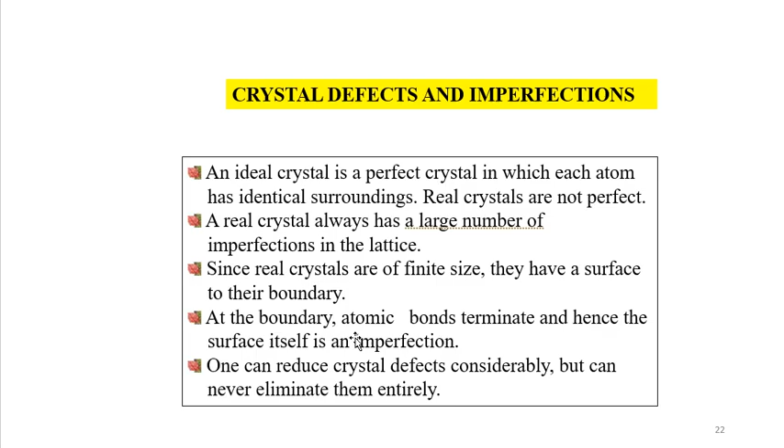Crystal imperfections can be classified on the basis of their geometry into categories or types. First, point imperfections, where a point in the lattice is missing. Next, line imperfections, where a line in the lattice diminishes, becoming a defect. Then surface imperfections, involving the top surface or another layer. Then volume imperfections, which appear like cracks.

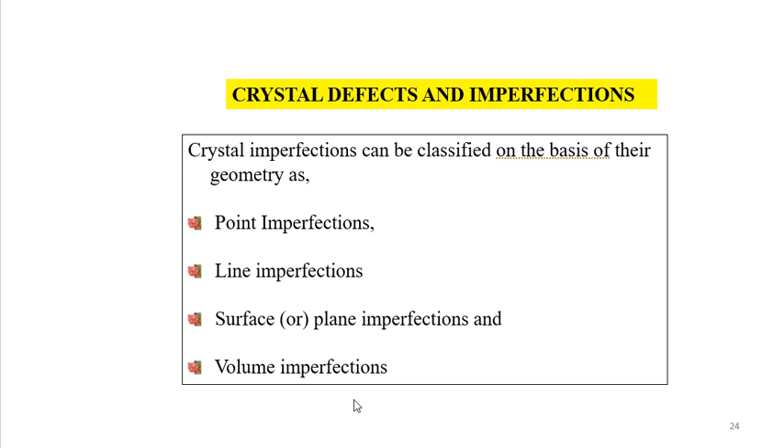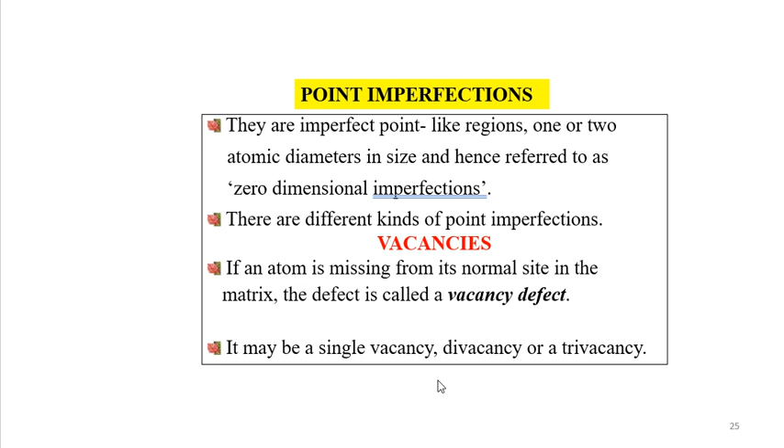In metals, vacancies are created by thermal excitation. When the temperature is sufficiently high, atoms vibrate around their regular position, and some acquire enough energy to leave the site completely — they absorb energy and get excited, moving to another place. When the regular atom leaves, a vacancy is created.

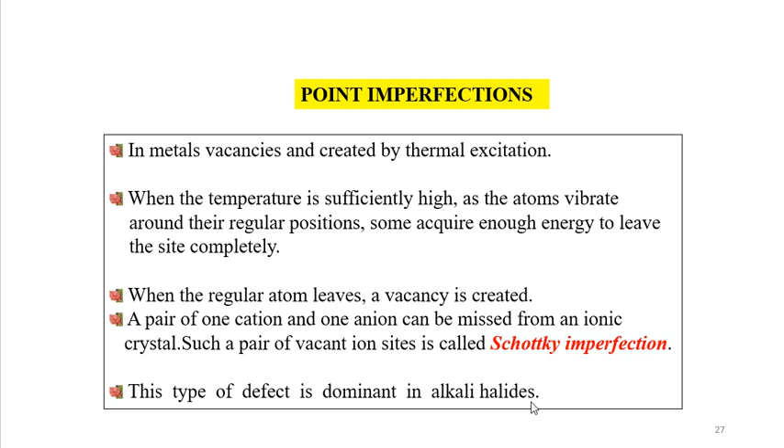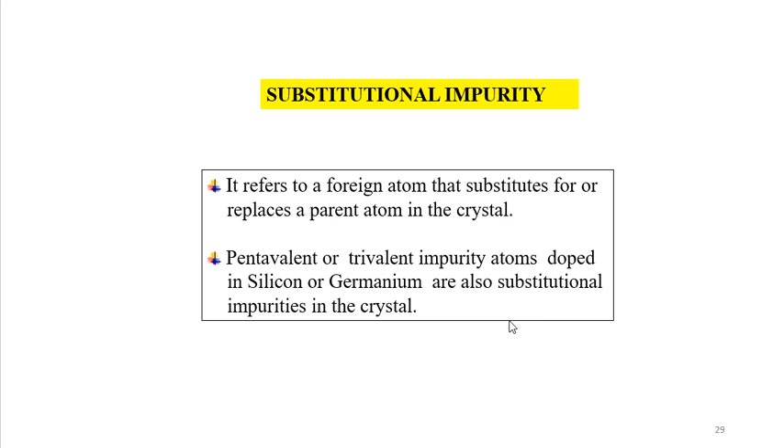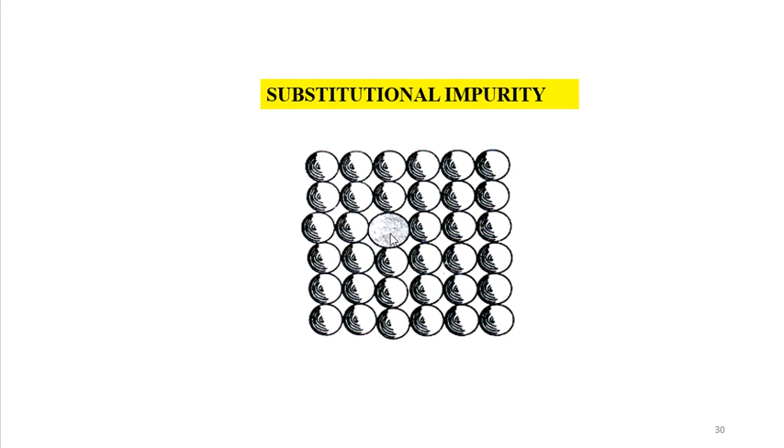Then there's substitutional impurity, which refers to a foreign atom that substitutes for or replaces a parent atom in a crystal. Pentavalent or trivalent impurity atoms doped in silicon or germanium are also substitutional impurities in the crystal. Here you can see the void filled with another atom — that is substitutional. It may not affect the properties at present, but due to changes later it will affect them, and you can also see a change in size.

Then we have interstitial impurity. The interstitial defect arises when the atom occupies a position in the lattice that is not normally occupied in the perfect crystal. In crystals, packing density is always less than 1. If a small size atom occupies the void space in the parent crystal without disturbing the parent atoms from their regular site, it's called interstitial impurity.

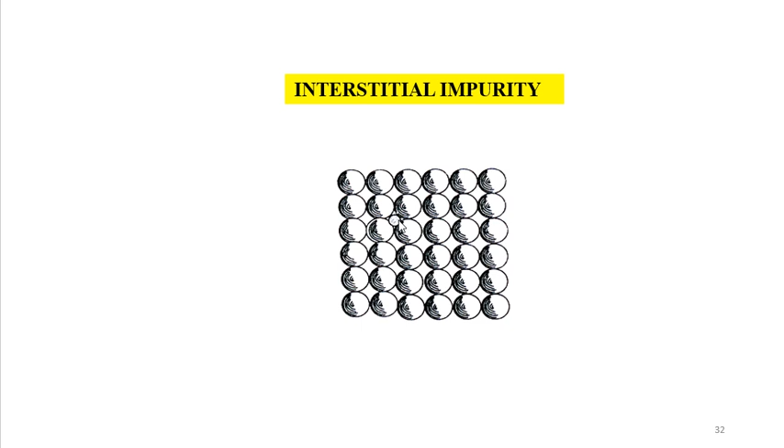Here your regular arrangement is there, but the impurity doesn't affect the regular arrangement, it just gets some space here without damaging the other arrangement. That is called interstitial impurity.

In ionic crystals, an ion displaced from a regular site to an interstitial site is called Frenkel imperfection. As cations are generally smaller, it is possible for them to get displaced into void space after finding some void. Anions do not get displaced as the void space is too small compared to the size of an anion.

As you know, cations are small, anions are huge, meaning their volume is high. So if anions are replaced by cations, that is okay, but cations can't replace anions due to the size. A Frenkel imperfection does not change the overall electrical neutrality of the crystal. This type of defect occurs in silver halides and calcium fluoride.

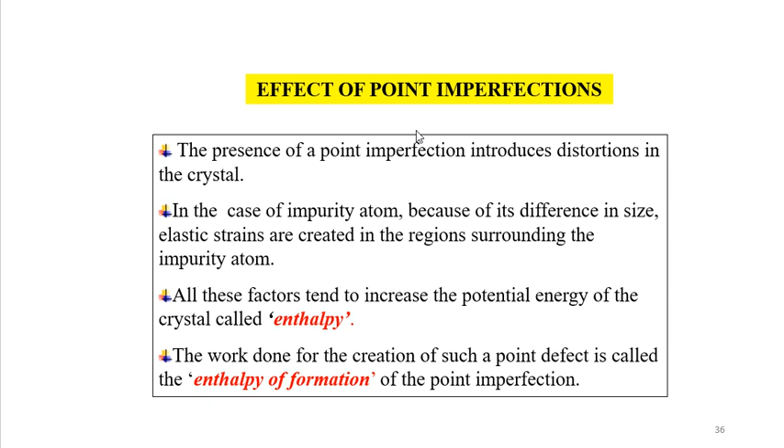Next one is line imperfections. Now you can clearly understand what point imperfections are and their types, how they happen, whether internally or externally. Now we move into line defects. In the previous case, only a point was missing. Now some near points as a line are missing.

The defects which take place due to dislocation or distortion of atoms along a line in some direction are called line defects. We now have direction. In point imperfections, you do not have any line, only a point. But here you have to identify what direction that line is formed. Line defects are also called dislocations. In the geometric sense, they may be called one-dimensional defects, 1D, only a line, not a kind of area.

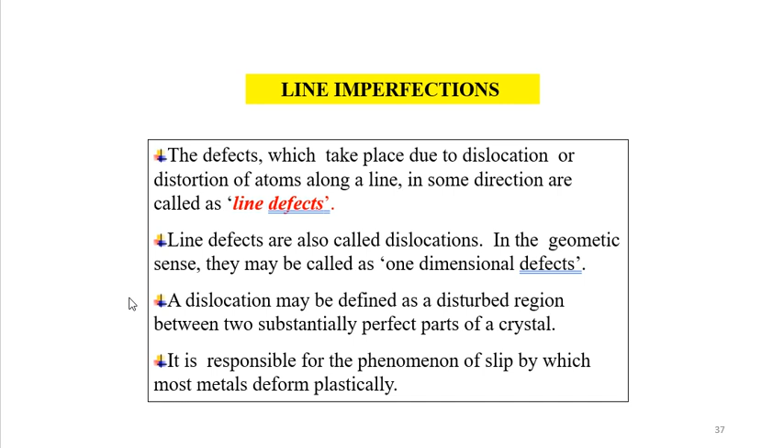A dislocation may be defined as a disturbed region between two substantially perfect parts of a crystal. Because if you want to define a line, you need 2 points. With only one point, you can't define a line. So if you have 2 points, then you can define a line. So more than 2 points is called a line, and more than 2 point dislocation defects is also called line defect. It is responsible for the phenomenon of slip, by which most metals deform plastically.

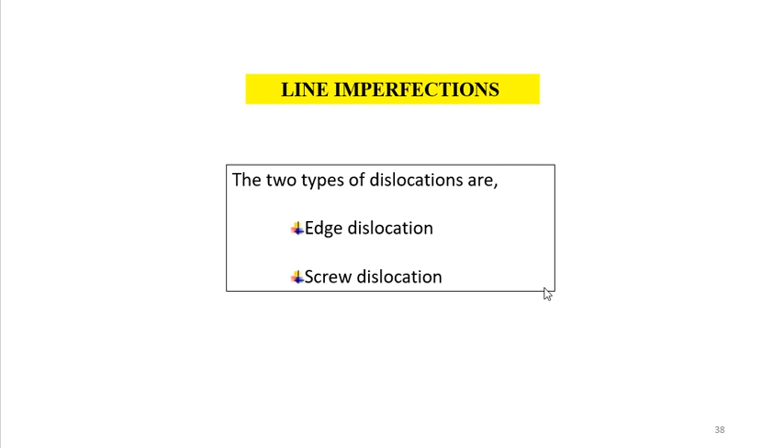In line imperfection or line defect, you have two different types: edge dislocation and screw dislocation. In edge dislocation, in a perfect crystal, atoms are arranged in both vertical and horizontal planes parallel to the side faces, because you have 3D X, Y, Z planes, arranged parallelly. If one of these vertical planes does not extend to the full length but ends in between within the crystal, it is called edge dislocation.

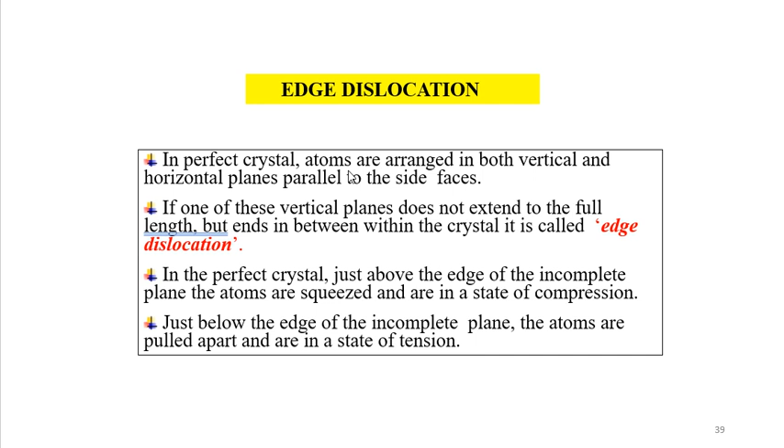If one of these vertical planes does not extend to the full length, with some decrease of length, but ends in between within the crystal, it is called edge dislocation. So in the perfect crystal, just above the edge of the incomplete plane, the atoms are squeezed and are in a state of compression. Just below the edge of the incomplete plane, the atoms are pulled apart and are in a state of tension.

You can see it goes into a 2D, 1D direction here. It means it goes, it gets removed, then it tends to have a kind of dislocation. The distorted configuration extends all along the edge into the crystal. Thus, as the region of maximum distortion is centered around the edge of the incomplete plane, this distortion represents a line imperfection called edge dislocation.

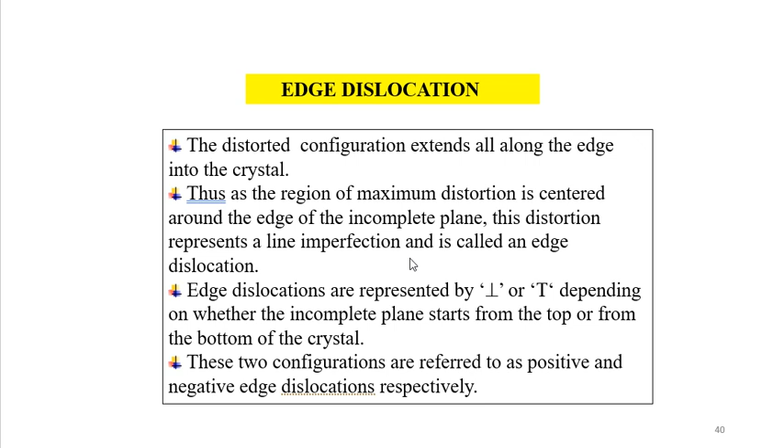It is represented by this symbol, T or inverted T, depending on whether the incomplete plane starts from the top or from the bottom. These two configurations are referred to as positive and negative edge dislocations respectively. Here you can see this comes here and stops here, so this starting and ending makes it T. If it starts from here to here, then it is negative T.

Then there is a method that they started to use to nominate this type of dislocation, at the points where you have the displacement. It's called Burgers vector, because you have direction here. To identify the direction, you need a vector quantity. The magnitude and direction of the displacement are defined by a vector called the Burgers vector.

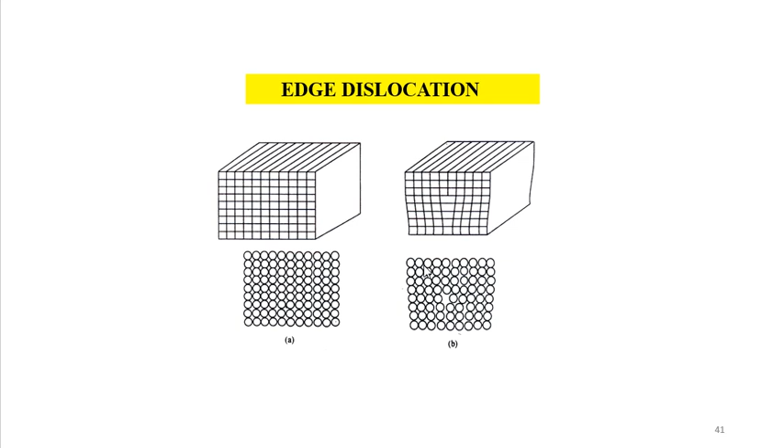In the following figure, starting from point P, we go up 6 steps, then move toward 5. A vector helps you identify the point of imperfection. Here you go 1, 2, 3, 4, 5, 6 and go downside 5. Here you see the defect, like what we do in our vector notations. Then move toward 5 steps, move down by 6 steps, and finally move toward left to reach the starting point, which is the starting point of the Burgers circuit.

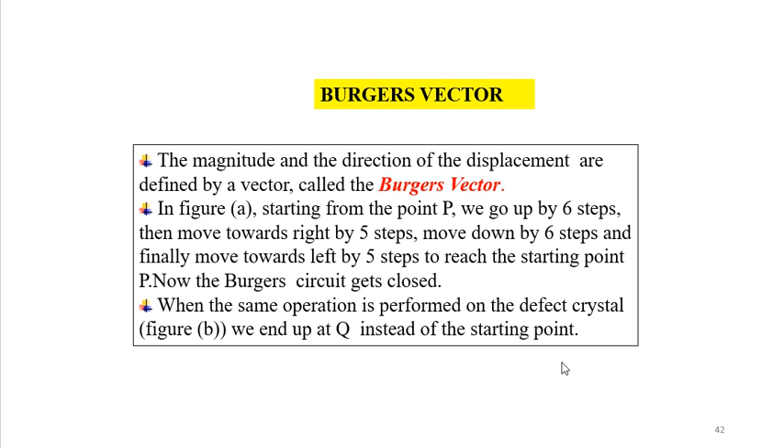Then it is closed. So when the same operation is performed on the defective crystal, we end up with Q instead of the starting point. Those are the notations we use for our Burgers vector. So we have to move an extra step to return to P in order to close the Burgers circuit.

Starting from here, it goes up, goes to this, and like this, you can actually complete your circle, with no misplacement. But if you go with this one, along with P, and come here, then go after here, you can see 1, 2, 3, 4, 5, 6. Here also 1, 2, 3, 4, 5, 6.

You need to go down, so you need to go down with this plane, not the vertical plane. So then you go 1, 2, 3, 4, 5, 6. From that point you need to go with the horizontal one: 1, 2, 3, 4, 5, 6, 7.

7 points you need to go horizontally. Again, 1 2 3 4 5 6, you need to go 6 points. Then 1 2 3 4 5 6. Here you can see you are changing your starting point. So that means you are moving away from P, right?

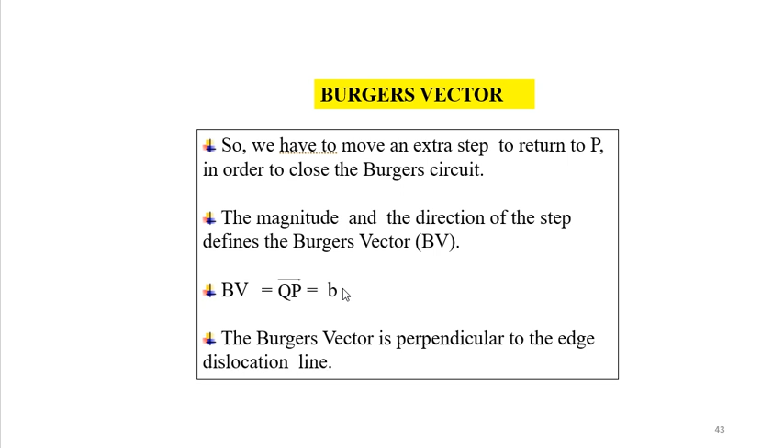From end to starting you need to come to one point, to your right side, then it is a vector point B. So we have to move an extra step to return to P in order to close the Burgers circuit. So the magnitude and direction of this step define the Burgers vector BV. Then QP is B. The Burgers vector is perpendicular to the edge of the dislocation line.

This is perpendicular to the dislocation. This is a dislocation plane removal. Then it is normal, right? That is what edge dislocation means. Any questions? Please ask.

Then we move into screw dislocation. In this dislocation, the atoms are displaced in two separate planes, perpendicular to each other. It forms a spiral ramp, that means around the dislocation. The Burgers vector is parallel to the screw dislocation line. Speed of movement of a screw dislocation is lesser compared to its edge dislocation. Normally the real dislocations in crystals are a mixture of edge and screw.

So in the edge you can see only a 2D one, but this one is 3D, right? Simply, the Burgers vector is something complex here, right? Okay, we'll see.

Here, this is the starting point, right? So you can go along with this and go here. Likewise you can come to one of the ending points, but after starting you have a different dislocation here, so then it should be identified with the Burgers vector.

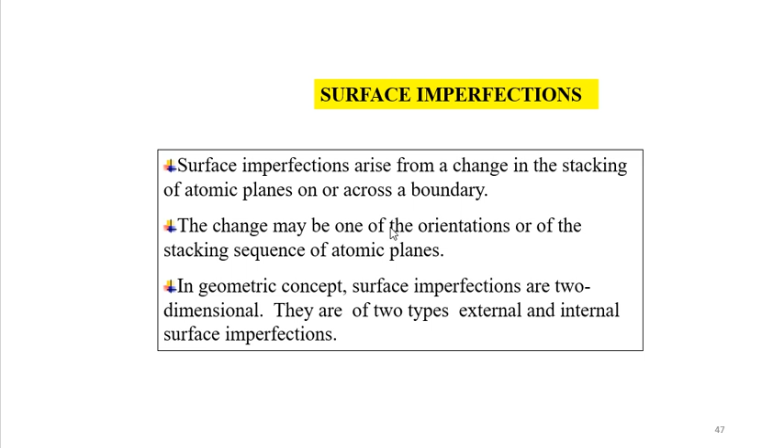External one means the imperfections represented by a boundary. At the boundary, the atomic bonds are terminated. Likewise, I have mentioned like edge one, but it goes to the surface, right? Then you have external surface, but in your edge dislocation, your surface is inside due to the void or due to that missing part. But here, this surface goes to the external one. So they are the imperfection represented by the boundary, where the atomic bonds are terminated.

You can see it. The atoms on the surface cannot be compared with the atoms within the crystal due to the lack of bonding of the surface. The reason is that the surface atoms have neighbors on one side only, right?

So here you can see, if you compare this one and this one, you will see. And again this one, these three, right? Here you can see this one has huge neighbor atoms - if you count 1, 2, 3, 4, 5, 6, 7, 8, 9, like 8 numbers here. But if you compare with this one, only 1 and 2. Here you have 1, 2, 3, 4, like it comes. So that is the difference with the external surface - you have some kind of differences.

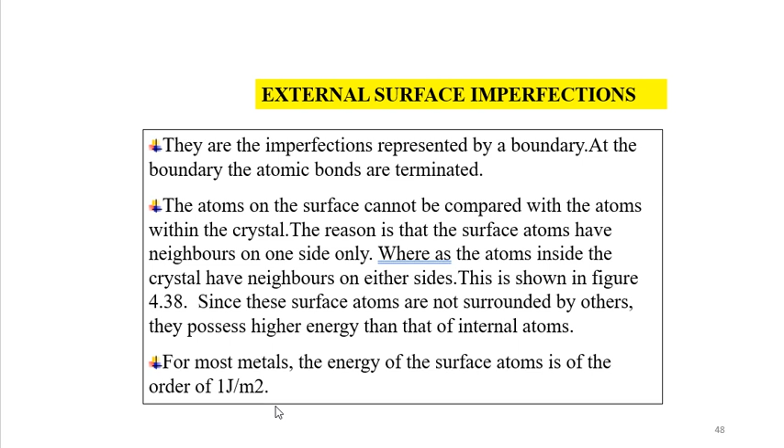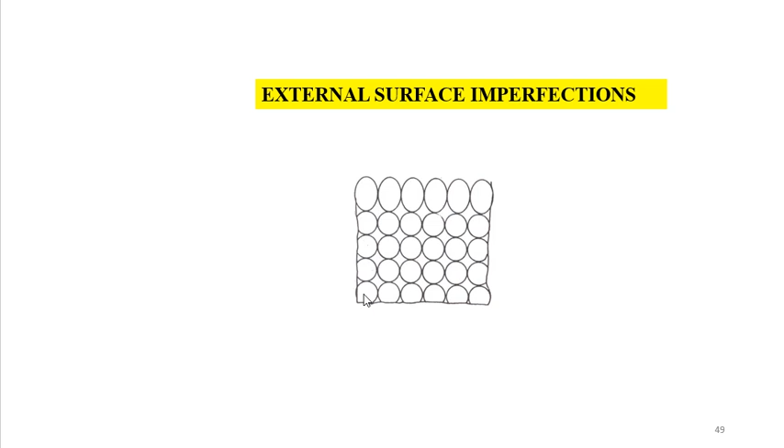This is shown in the figure I showed you. Since these surface atoms are not surrounded by others, they possess higher energy than internal atoms. For most metals, the energy of the surface atoms is of the order of 1 joule per square meter - that is the surface energy. Here you can see the changes inside the material and the surface, and the surface also has different areas, right? Here and here, these are also different areas.

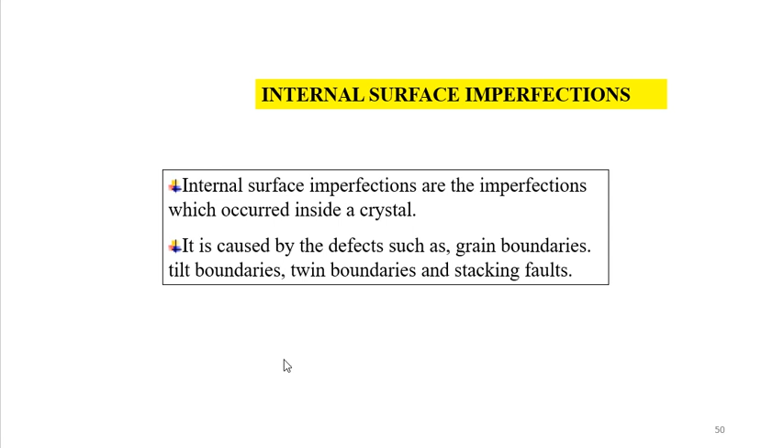Then we come to internal surface imperfections. Internal surface imperfections are the imperfections which occur inside the crystal. So one I mentioned is the external one at the surface, but here it's internal, inside the crystal. It is caused by defects such as grain boundaries, tilt boundaries, twin boundaries, and stacking faults. Those are the types.

Now we will see what is called grain boundaries. They are the imperfections which separate crystals or grains of different orientation in a polycrystalline solid during nucleation or crystallization. As I mentioned in the crystallization stage - crystallization and recrystallization - they show the difference between crystals and grains, how the grains occur, how the crystals occur. I also mentioned nucleation, then separation, those are growth. All these have been shown.

So they call it the imperfection which separates crystals or grains of different orientation in a polycrystalline solid during nucleation or crystallization. It is a two-dimensional imperfection. During crystallization, new crystals form in different parts and they are randomly oriented with respect to one another. Now you know what grain boundary means and how the grains are arranged inside metals or materials - the different orientations because they have different shapes.

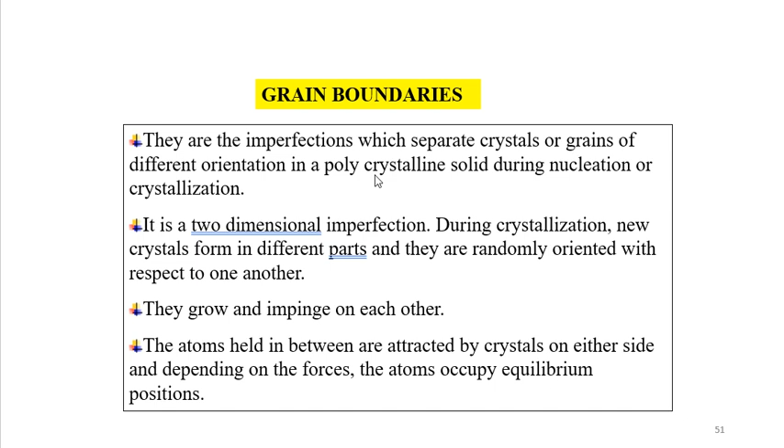These positions at the boundary region between two crystals are distorted. As a result, a region of transition exists in which the atomic packing is imperfect. So I'll draw something like this - okay, this is one grain, and again this is another one, and again you have another one like this.

So this grain I'll note as A, this one A, then B, and C. So A and B can use this boundary here, and again B and C also use this one, but A and C can't use this one. If you have a D here, then D and C can use it because of the separation changes - that is the grain boundary here also.

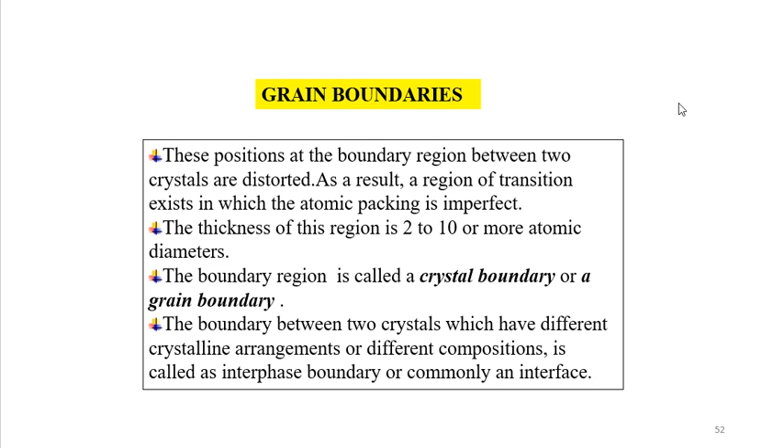The boundary between two crystals which have different crystalline arrangement or different composition is called an interphase boundary, or commonly an interface. So I already wrote here the different areas, but they have a common boundary - different areas, common boundary - they have different kinds of properties, but the area, that grain boundary, both of these grains can use.

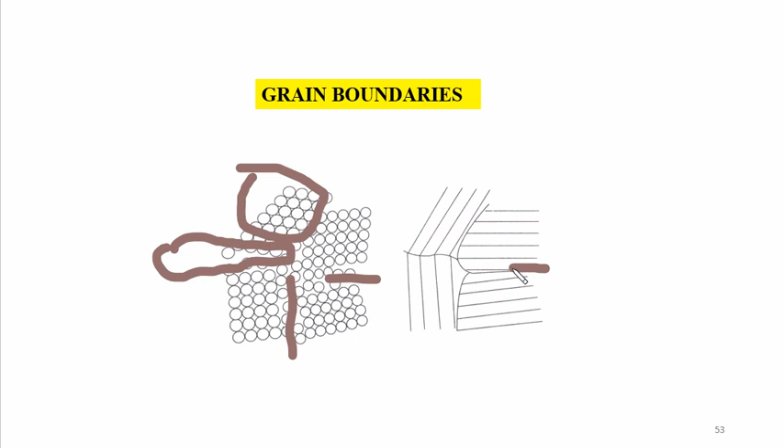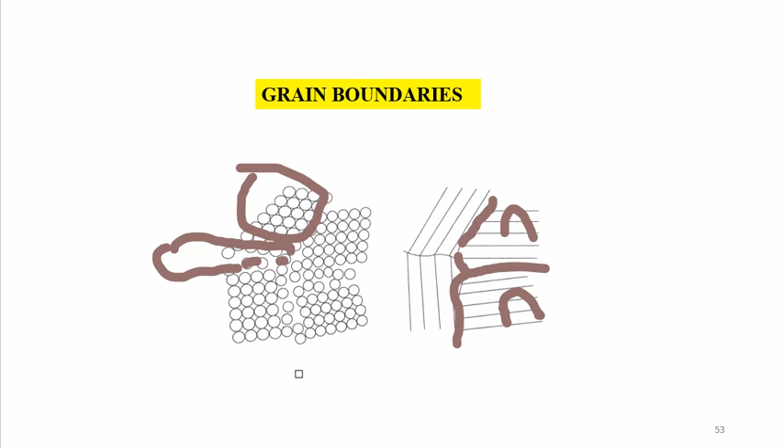Here you can see these arrangements. This is one crystal, this is another crystal. In between two crystals you have an area where you can't see exact arrangement. Here you have a good arrangement, but in this area you can't see any arrangement. These are called grains or crystals. This one is a crystal, this one again a crystal, each with different kinds of boundaries. From the boundaries they tend to break the arrangement of crystals. You have crystalline arrangement and amorphous arrangement, but here we discuss only the crystalline one.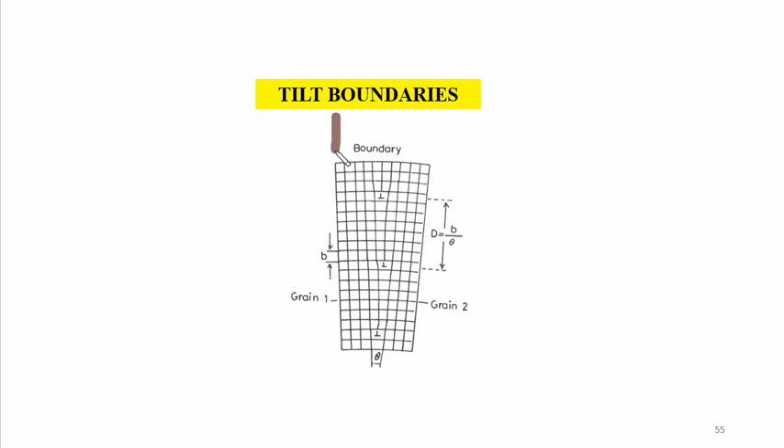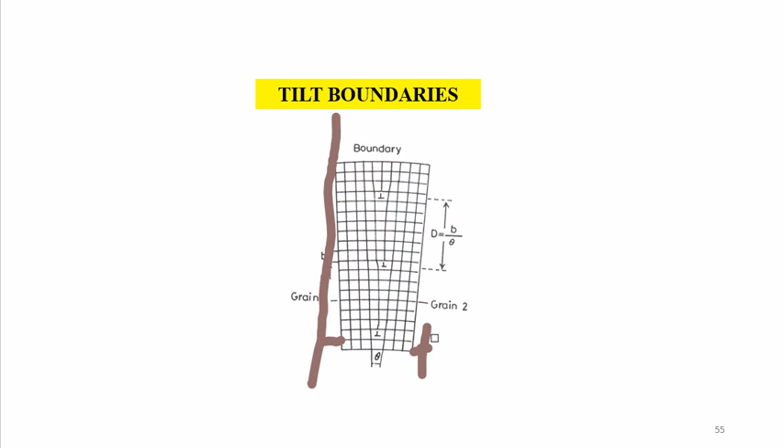Using that, you can see the arrangement is tilted, because it should go vertically like this, but now it has some differentiation. This is what I call theta. So if you find that theta, that is the tilting angle of this crystal. That is how the tilt can be found here.

This is the original distance D. Then B is one, meaning we call it the Burgers vector unit. From the x direction, this is one unit, second unit, third unit, likewise you count - that is called the Burgers vector unit. D is the average vertical distance between dislocations. To get the average, you can get the total and divide by 2. Normally those two are equal. So to get the perfect average, you take the total and divide by 2.

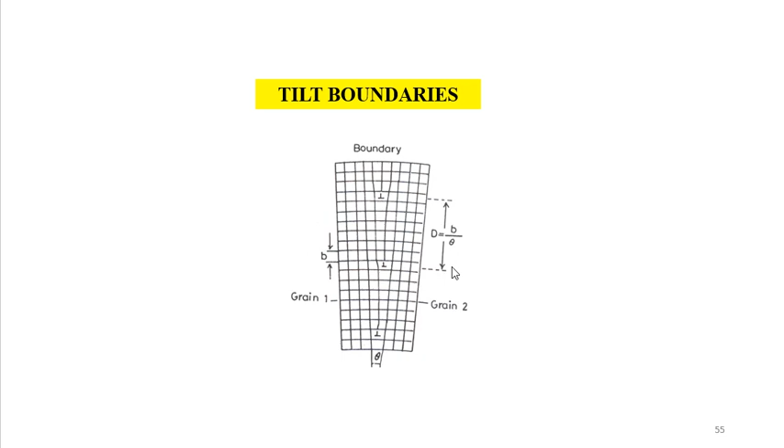Then D here, B over theta. The D number you can calculate here also: 1 2 3 4 5 6 7, so D is 7. Then B is your length divided by theta. Then theta you can find as B over D. Here, B over D, you can also get the tilt, which we call the tilt angle.

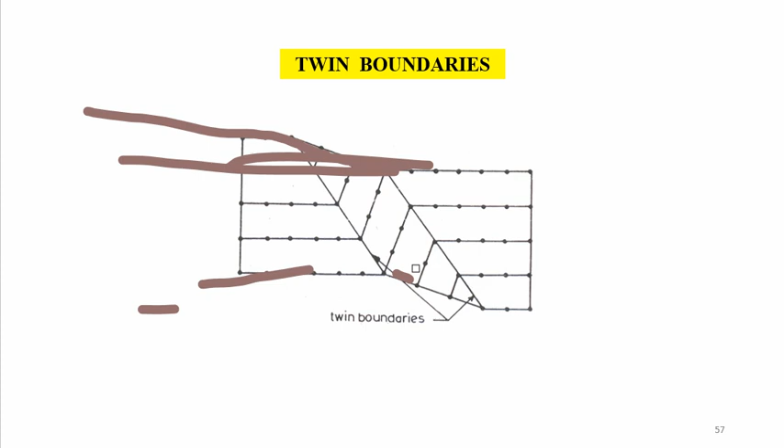If the normal arrangement goes like this, that's normal. But if twinning happens, it goes like this instead, changing in only one direction. If the second boundary happens, then it should go back like this - both ways it changes. Then it is called twin boundaries - twin action, like the difference of action of two forces.

We call them stacking faults: whenever the stacking of atoms or atomic planes is not in a proper sequence throughout the crystal, the fault caused is shown as a stacking fault. For example, the stacking sequence in an ideal FCC crystal may be described as ABC, ABC, ABC, ABC. But the stacking fault may change the sequence so that C is missing - ABC, AB, then A, again ABC - due to a fault.

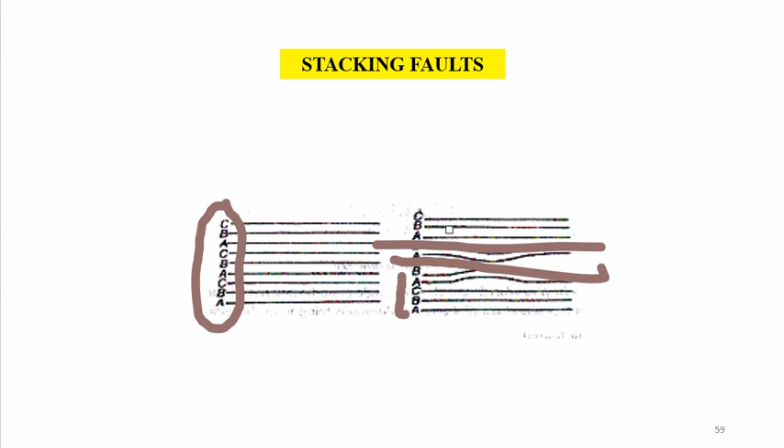The region in which the stacking fault occurs forms a thin region and becomes HCP, hexagonal. This thin region is a surface imperfection called a stacking fault. Here, normally you have ABC, ABC, ABC arrangement, and that's okay. But starting from here, A is okay, B, C, then A, B, C is missing, but some arrangement happens with the lines of these two. You can see how the lines change, and C is not there. Then starting with A, B, again C is not there, but then A, B, C comes again. So those are the kind of faults you can identify, called stacking faults.

So those stacking faults also happen to start something from the imperfections. Then it goes to initiate a crack or initiate a dislocation movement inside the material, like edge dislocation. So now we've discussed imperfections like point imperfection, line, surface, and now we come to volume imperfections.

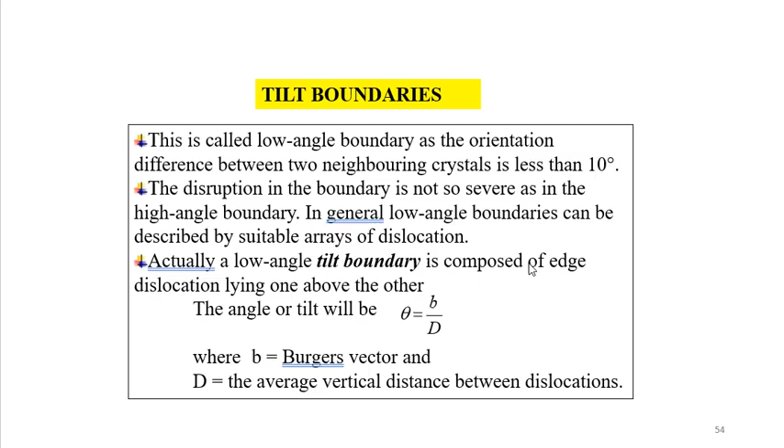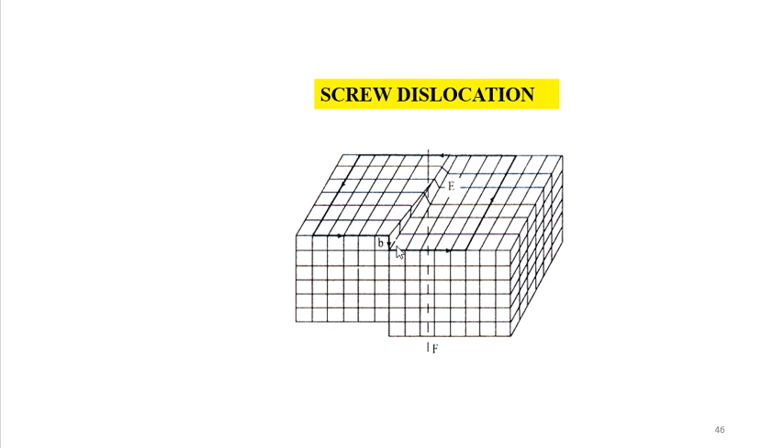As an example, like a cake - this one is a cake. If you try to get a slice from this, a parallel slice, then it is removed. So removed means you can see a volume there - some amount in the x direction, some amount in the y direction, and some amount in the z direction. This is something we identify as a volume-wise missing. So volume defects such as cracks may arise in crystal, because a crack you can see only as 2D, but it goes deeply into the Z direction as well, so some amount of volume is lost.

So when there is only small electrostatic dissimilarity between the stacking sequence of close packed planes in metals, then presence of a large vacancy or void space when clusters of atoms are missing is also considered as a volume imperfection.

That means, if you have a soil sample or soil cube, and you do a borehole from the top surface and remove some soil from that surface, then go deeper and remove some amount of soil from inside as well - the removal from the soil sample forms a kind of shape that you can form with the removal of that volume sample. That is also how you can form a volume. So that volume is misplaced, not a single atom or a single line - you have x direction removal, y direction removal, and z direction removal. So the total will be removed, and that removal happens like the volume one. Then we call that volume imperfection.

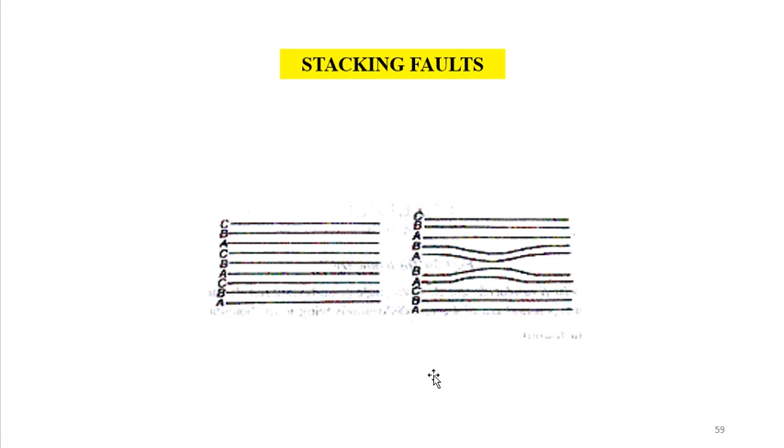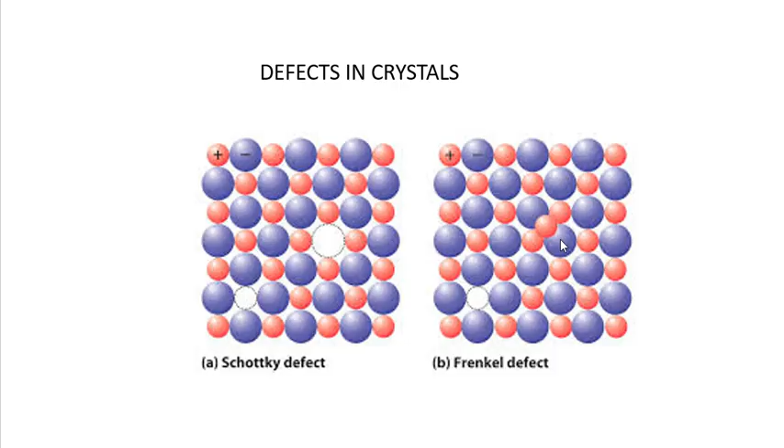So if you have these type of imperfections, there are so many imperfections that we already discussed. Then it goes to a point where we have - already showed you this one. Here this one is missing, both are missing, but here only one is missing and it keeps aside like this. So all of these happen due to some ways of finding energy for the excitation.

Here you can see this is the cracking. Inside this cracking you can see an amount of volume is misplaced, because if you apply stress here, this volume will remove, but another volume will fill, as here. So this is your original position - these two are your original positions. So the starting is this.

So sometime back, this one comes to like this, then again this one comes to like this. So you remove this part - you remove this part, this one, and this one. You remove it, but separately you find something new, these two. So if you get it volume-wise, this volume - these two are equal to the removal of this one.

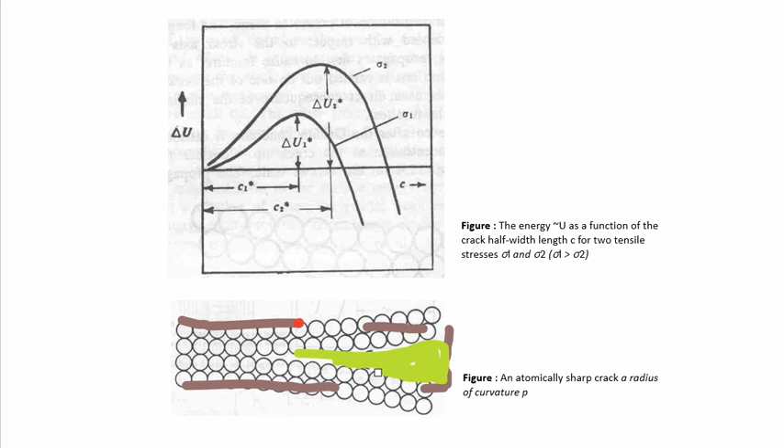That is a physical appearance that we can also see, right? Only thing is it moves up or changes location, but the challenge is if it propagates through up to this point, that is okay. Up to this one, separation has happened, but the total separation is not happened. That means it's not totally separated into parts. But if it separately comes from here to here, then we call that a failure.

Only this one is a fracture, but if it comes to this point, then we call that a failure. So that is the difference. The fracture can happen, or dislocations, anything can happen, but if it comes to a point where there is a separation of their volumes or their regions with the material, then that is what we call failure, not a fracture.

So fracture can happen if you have the excitation energy, like delta u, then it will propagate. If the propagation comes to the other end from here to here, then it tries to separate both, we call permanent. If it separately comes to positions of two, meaning separate elements, then it is a fracture propagating to a failure.

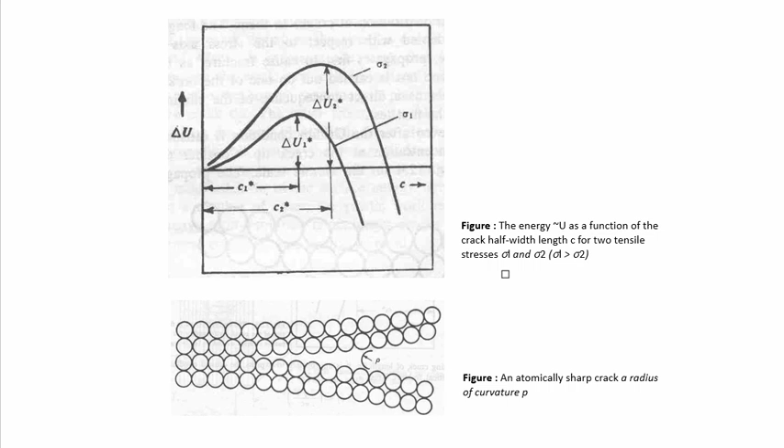So now you can see the difference between what is called fracture, what is called failure, and defect. Those are the imperfections and the defects. After the imperfections or defects, then it will move to a fracture like this, but this fracture is not called failure. These are the fractures that happen, these are the imperfections that happen, but that is not the failure. The failure means this has to come to here and to here. So this propagation needs to happen to the 3D dimension.

So if it comes to 3D dimension, then what happens? Those two get separate items. So if you have separate items like this, if it separately comes to a position like this, that is what we call failure. So if the failure happens, then definitely that creates some kind of disaster for the material or for the application.

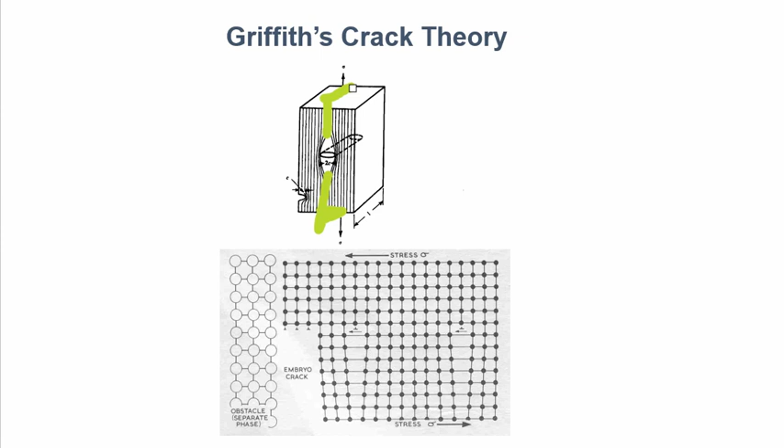So if that happens, then that ends up with some amount of accidents or something that we can't bear, like the Titanic. So we can't bear after this type of failures happen. Fractures can be eliminated, something we know now, but failures we can't actually bear. So that is the difference of fracture, failure and defects. Differences are also there with the brittle and ductile.

So if you have ductile, you have something called a safety limit, because it shows something before fracturing, before failure, not the fracturing itself. You have a fracture, but it shows something before fracture and failure - that is ductile. But if it's ductile, and if you have a brittle one, you have the fracture and failure equal. So that is the difference.

So that is why we have brittle applications and again ductile applications, like concrete, because we can't just replace something with concrete. We can't replace a metal sheet with a concrete sheet, we can't replace a metal slab with a concrete slab. But we need to apply that, we need to use that brittle material. The thing is, you have to change your properties according to the application.

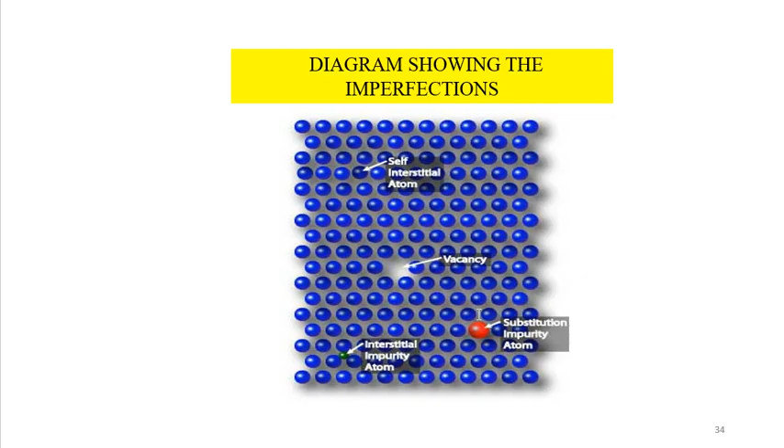So I think now we have come to the end of our discussion with defects, fracture and failure. That's the difference between these three words.